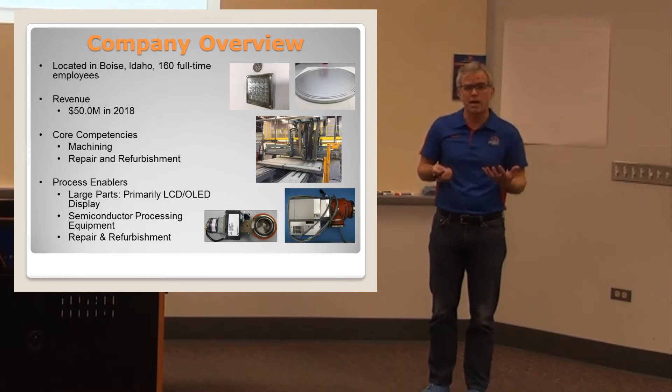But our core competencies are machining and repair and refurbishment. I'll show you a little later some of the components that we machine, some of the machines that we use, and then some of the repairs that we do. We literally take electromechanical devices, seals, robots, valves that our customers use that for whatever reason have failed, and we tear them apart, we clean them, and repair them like new. Whether that be a printed circuit board, a valve, a bellows, electrical wiring, anything of those natures we can refurbish.

Basically, for all intents and purposes, we're process enablers. We add value by creating products that allow our customers to make LCD and OLED displays, semiconductor, memory chips, and microprocessors. That's the industries that we serve. We do a little bit in aerospace, we do a little bit in medical.

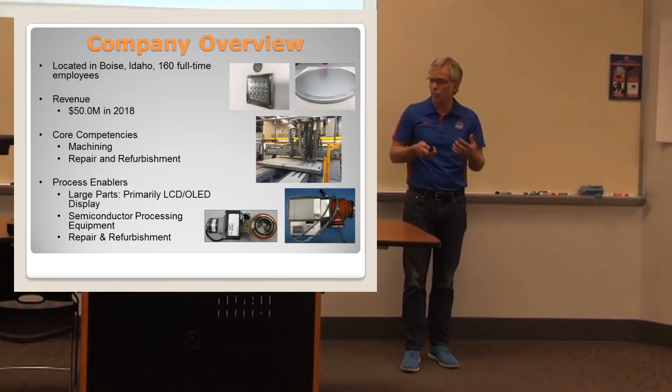But just to give you an idea, an analogy of the markets that we serve, I want you to think about your very first car that you ever drove or had. I'm sure that if any of you are like me, it probably wasn't the greatest thing. This was my first car, a 1975 Ford LTD station wagon. It got from point A to point B.

And at that time, the manufacturing of a car included a lot of human work, hand work, and machining. Matter of fact, the very simple motors that were going into cars like that were built on very simple machines, in some cases forging machines, in other cases stamping machines, and so forth.

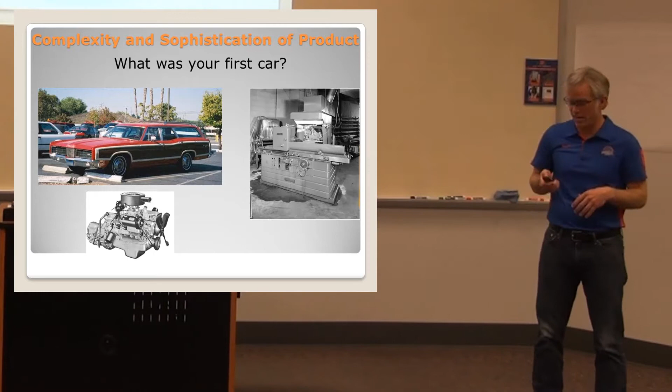That was my first car, and the machinery to make that stuff was pretty simple. What I wanted when I was a young teenager, as my first car, I wanted this. Most of us understand that when you drive a Ford station wagon and you see an Indy 500 car, you definitely want the one that's faster, more sleek, and more cool.

The reality is that over the course of about 35 years, instead of having basic machines and basic components to get a car to operate the way it's intended, we've taken vehicles from just getting point A to point B to adding sensors, adding computers, adding features. All of us are accustomed to those today in our cars. But in order to do that, we had to get away from a lot of the manual work and into more highly sophisticated machines - simple to say, but harder to do in practice.

This machine right here is what we call a duoBLOCK. It's a 5-axis machine that can mill engine blocks, engine heads, and transmission components that are extremely complex and tight tolerance. 35 years ago that was impossible to do - we just could not do that with the machinery we had. The evolution we've seen in practical things we use in daily life has also happened in the industries that we serve.

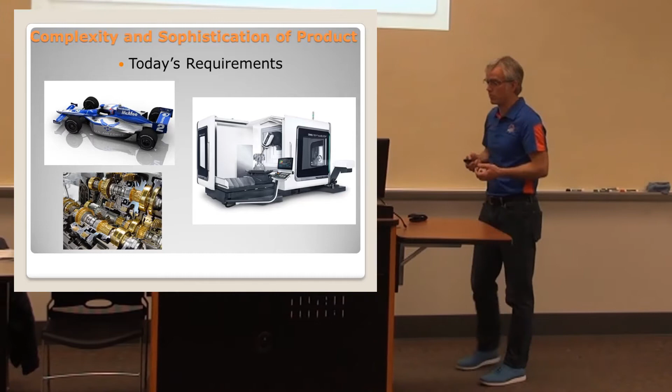Back up to about 1998, 1999, most of us can remember a TV was a cathode ray TV. How many of you actually had a cathode ray tube TV? So most of you know what I'm talking about. How many of you still have one of those TVs? They just don't exist. Let me describe the evolution that's gone on in making this TV to what we all watch today.

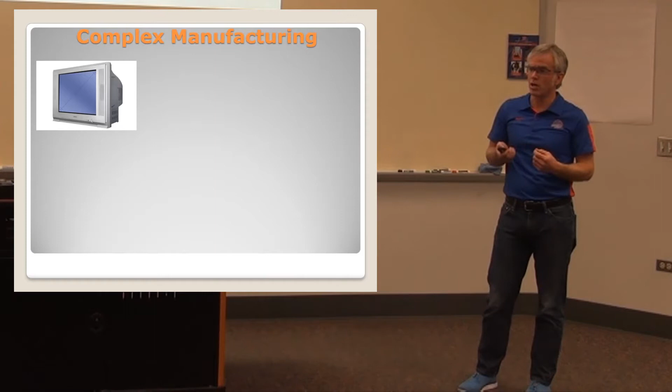This TV, which is a Sony TV, had very little machining. A lot of the components used to make that screen were screws, assembly components, stamped pieces such as housings and bezels, but very little machine components to make any of the work in that TV. If we were to look at the quality of that TV versus what we look at today, none of us would want to go back to that at all.

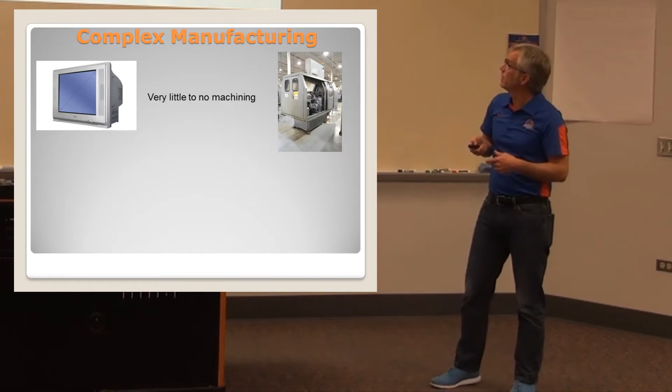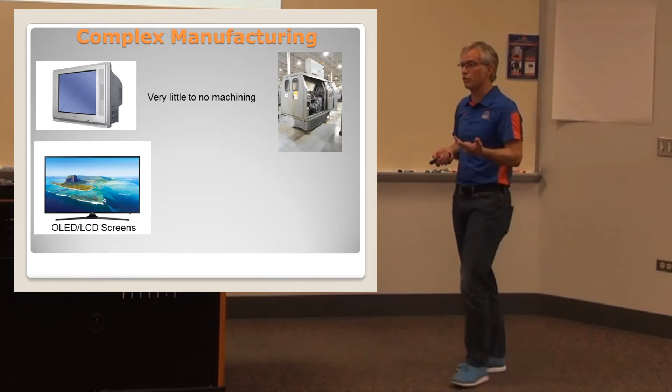The reality is today we all use OLED and LCD TV screens, and these are extremely complex, sophisticated, and very challenging to make. This is one of the areas we're involved in. We sell components used to make LCD and OLED screens to Sony, Samsung, LG, Sharp, Vizio - all the screen manufacturers in the world. We have components that go into their machines to make those.

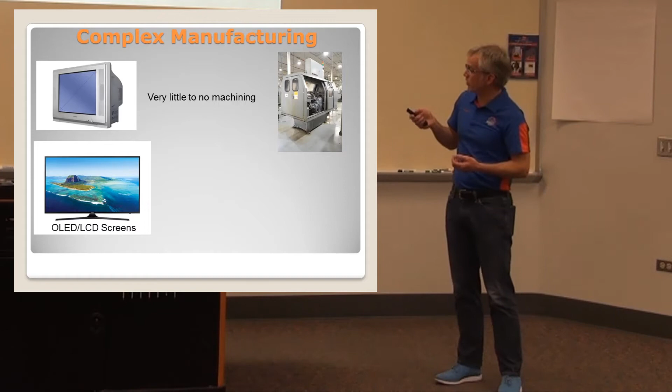If you look at the machines that were used to make the old cathode ray TVs and their components, the complex machining today is much different. I'm going to share some of this with you today.

This machine right here, we have 19 of these at our facility. These are 3 and 4 head milling machines, about $990,000 a piece. We make a large component we call a diffuser. It has anywhere from 25 to 170,000 holes in it, all different geometric angles, to create basically a shower head. It allows material to flow through this component onto glass so customers can make a transistor in the glass itself.

In order to manufacture that screen, the machines that are used to make it, which our parts go into, typically cost about $90 million - just so you can get the machine and start producing glass. You still have to make the TV, and that's another complex thing.

But in 1998, AceCo was asked if we could make components that were a 1 foot by 2 foot square with about 3,000 holes in them. I'm going to pass around some examples. So we started making those. What you'll see here is a cross section - you'll see a cone on the top, a counterbore drill on the bottom, and a very small through hole intersecting those. It basically looks like an hourglass.

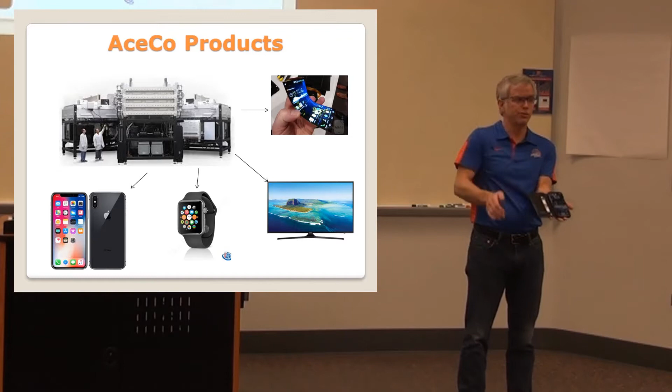Samsung will produce this year at the Consumer Electronics Show in Vegas a foldable phone that, rather than having a phone with just a screen like this, you'll open it up and you'll have 2 screens all connected together, foldable and flexible completely.

Well, the only way that can happen is having the capability of a machine shop and other component manufacturers with the ability to make components that make these machines work like they do under extreme tight tolerances. We can no longer operate like we used to under very broad and open tolerances.

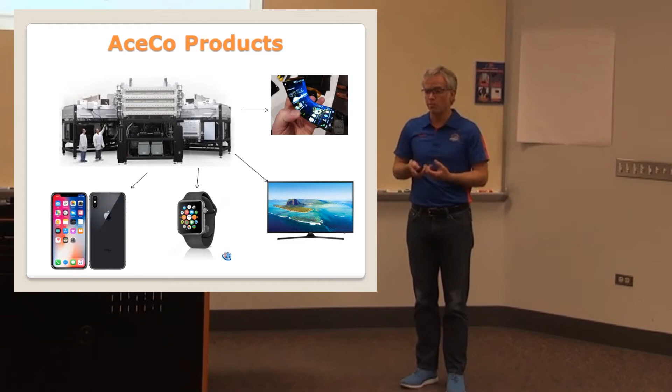We are drilling parts, going back to this part right here, 12 feet by 12 feet, with a flatness plane of 10/1000ths of an inch.

We drill 170,000 holes on this component here, very similar to what you're passing around there. The intersecting hole is 16/1000ths of an inch. It can be no greater in diameter than 1/10,000th of an inch across all 170,000 holes. And in addition to that, it cannot have a length change more than 2/10.

So when you're drilling 170,000 holes, understanding how your machine works is one thing. Being able to drill it and have the correct machining components, that is the drills, the end mills, and so forth, to do that is another thing. That's what we've perfected at AceCo.

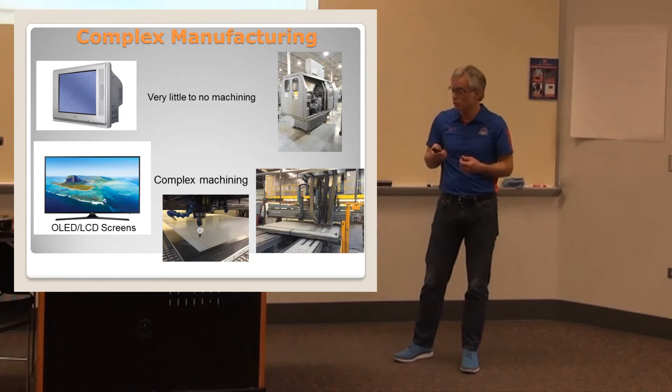Here's a diffuser. That is a coupon taken right out of the middle of this diffuser here. If you are carrying a Samsung Galaxy or an iPhone that has an OLED screen, your screen was made on this part. Every single iPhone and Samsung Galaxy that we see is made on an AceCo part. Every single one of them. Typically LG and Samsung and Apple, all of them making those screens.

So you can see, here's the blown up cross section of that. Having a large cone with a counterbore, doesn't show the full length of the counterbore, but that intersection right there, and removing and ensuring that there's no burrs at any of those intersections, is AceCo's value.

We've spent decades in our company collaborating with our engineers and our machinists and our machine tool manufacturers on how to do this, so that not only do we produce one part, but we can produce thousands of parts, always being the same without change.

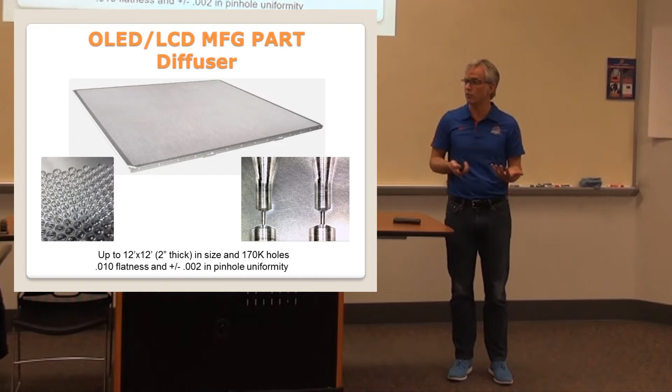The last thing our customers want to do is figuratively have a recipe to bake cookies and realize they've got to change the recipe, the temperature, or so forth. And in this case, the complexity of the processing is incredible.

In addition to that, AceCo makes other components that are used to make memory chips and microprocessors. I'll pass this one around as well. It's called a faceplate. And through that part, in a machine very similar to what you see up here, our parts are used to lay a deposition onto a silicon wafer.

In that matter, customers are able to lay the architecture and the design of the chipset in those machines. That part that we're passing around right there has about $170 worth of material, and at AceCo, that part will sell for about

$3,500. We make roughly, maybe 750 of those a month, of all different designs. On a good month, maybe 1,000 of those.

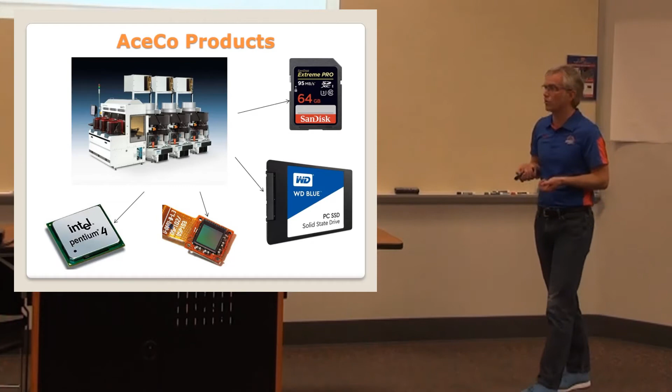But our customers, the Texas Instruments, the Samsungs, the Sonys, the Intels, the SanDisk, all of those chip manufacturers are using our components to actually make their wafer chips, which we use every single day, all of us in this room. And for that matter, this is a new iPhone 11, which, by the way, is an incredible piece of electronics.

I have one here, and to see it broke down and look at the complexity of what it can do, not only do we have the flash storage and the sensors here on one layer, we have the microprocessor, the modem, the receiver, and in addition to that, the battery itself. All of that stuff being put in a very, very small, compact design that we carry around with us.

The capability of these components now require machine shops to have extremely high tolerance in our machining. The only way that we can allow our customers to make the chips that they do is to produce extremely tight tolerance parts.

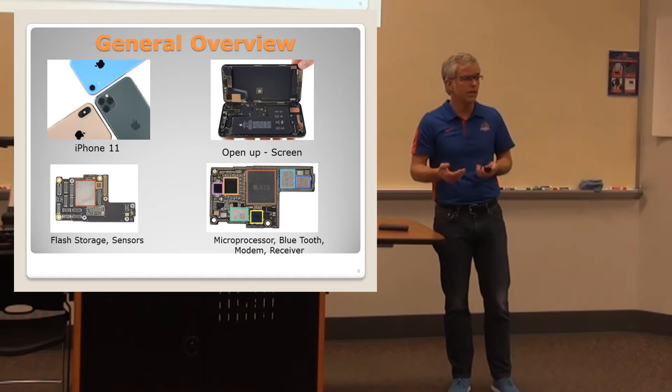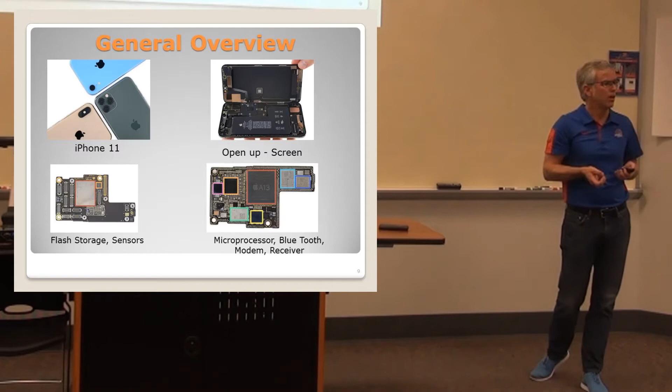Historically, in the last 15 years, chip manufacturers - that's the Samsungs, the Microns, the Intels of the world - were typically laying deposition and memory in a very lateral motion. But now the chip manufacturers are doing all of that in a 3D architecture and going vertical, through a series of depositions. So on a typical chipset, you can have roughly 250 to 350 layers of deposition, anywhere from 8 to 10 atoms thick, all the way up to a couple microns thick, depending on the application.

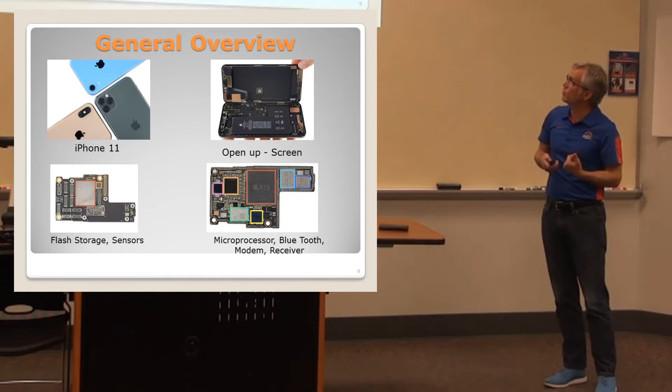But the reality is that we, as users of electronic components, are demanding more sophistication, more memory, more processors, more capability. And as a result, we want it in our hands in a very small area with extreme low heat and processing, so that it doesn't eat up the battery. So there's been a lot of demand on machine shops to increase the sophistication of the product that we make.

So here are some of the other components that we make. For instance, a gamma shower head - this is used by Intel for a deposition process. And an electrode, on a Tokyo Electron tool set, used in the etch process to etch away material to create the architecture on a chipset.

And other components - this is a susceptor pedestal, with wiring and a built-in heater. That heater can heat up to about 570 to 620 degrees C, and the wafer actually sits on that pedestal and heats up during the processing itself.

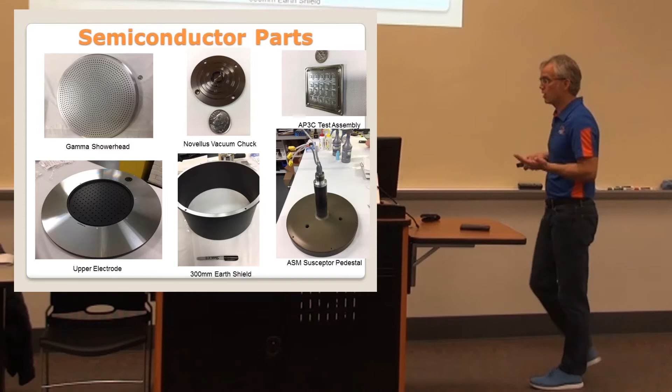And the top component here is a Novellus vacuum chuck. We sell those components to Intel. It's made out of a high-density polymer called Vespel, made by DuPont. That piece of material right there is about $580.

So the last thing you want to do as a machine shop is come up with a process that doesn't work, so you end up scrapping $550, $580 pieces of material over and over. So we have a lot of demand on our engineers to collaborate with our machine shop on how we design products - engineers are great, extremely good at creating and designing product, but in many cases some of the stuff that's designed can't be made. And that's the challenge we have as a machine shop: taking designs and making them into products that can actually be produced.

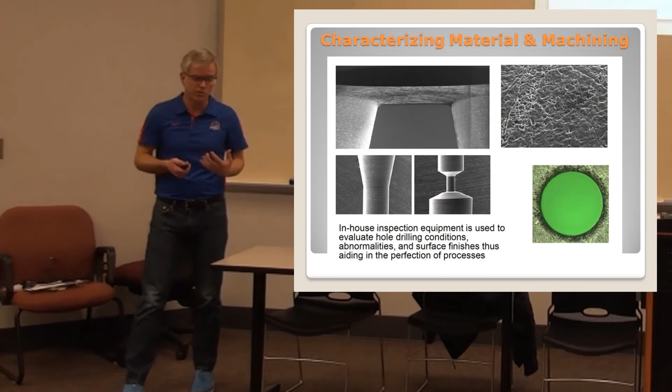At AceCo, we consider ourselves a high-precision machine shop. I've been around enough machine shops to know that there are very few, matter of fact I don't know of any machine shop that says they're a low-quality precision machine shop. Everybody says they're high precision, but the reality is that AceCo is extremely high precision.

And we use very sophisticated inspection equipment, which I'll cover here in just a bit, to help us understand how we machine. For instance, at our facility we have an electron microscope that we're capable of using for material analysis and high-resolution pictures, to help our machinists understand what they're machining, and also to help our engineers who design these products - these types of holes and features - better understand whether or not they're machinable.

In this case, we were trying to put a radius at the top of this cone, and that radius is very challenging because typically on a radius tool it'll leave a step. So our engineers came up with a brushing method - a way of brushing with a kind of brush sandpaper - to actually round that edge. And that product is now enabling our customers to make an extremely sophisticated touch screen for the medical industry today, for high resolution review of x-rays and other imaging, which probably wouldn't be possible had our engineers and machine shop not figured that out.

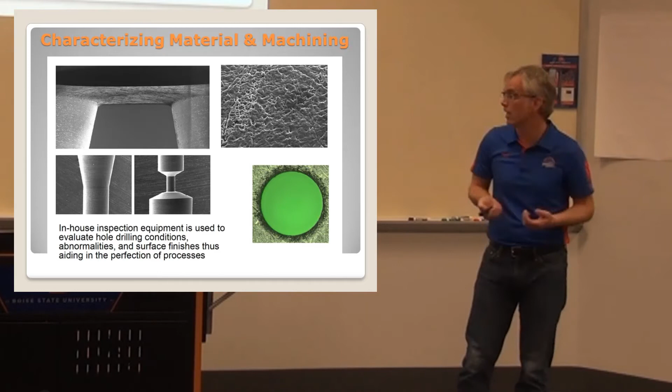In addition to that, we work with our machinists and our engineers to identify the best type of machining components today that we can use in our production process to produce the tolerancings that our customers require.

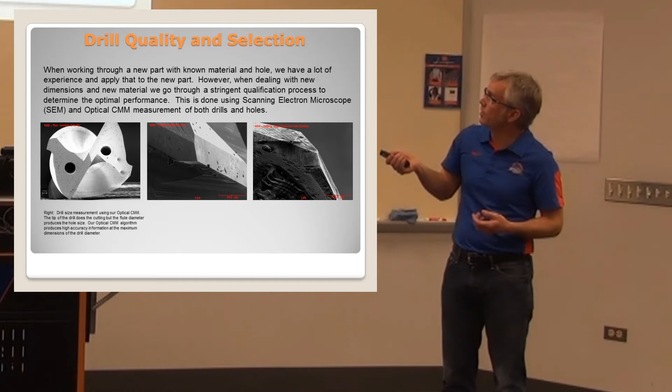I'm going to pass around an example of that. This drill right here is 16 thousandths of an inch in diameter, extremely small.

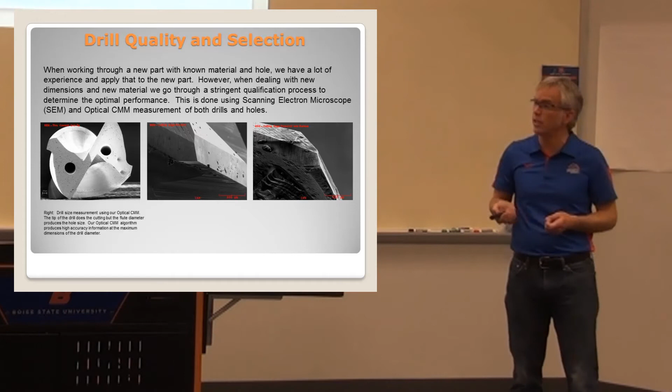In 2014, Mitsubishi figured out how they could put a hole from the top of that drill all the way through the cannulation of the drill so that coolant could come out right at the tip of the drill, right next to the cutting surface. As a result, we could eliminate the binding of the drill, the heat that occurred, as well as the chip breakage we needed. We were able to produce a much smoother surface with that and the longevity of the part itself.

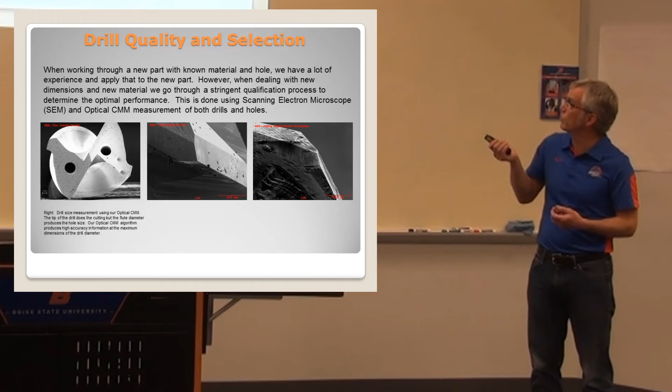In addition to that, we were able to take our inspection equipment and understand at high resolution how the tips of the drills are wearing in the process. This is a brand new drill - you can see how sharp that is - and after drilling a number of components, this helps us understand how many holes we can drill before the quality of the hole breaks down.

I'm going to pass around a drill here so you can actually see how small that is. If you drop it or break it, don't worry about it, I'll pass another one. But right on the very tip of this drill - I know it's very difficult for you to see - if you'll take the magnifying glass with the front downward and look at the end of the tip, you'll be able to see the holes in that drill and see how small they are.

Our engineers developed a process to understand how we filter the fluid going through that drill, but in addition to that, identifying what pressure we can run that coolant through the drill and effectively cut the material we were working on.

That drill runs anywhere from about $40 to $90 a piece. Some of the higher end ones we use can go as high as $150. When you break 100 of those in a month, it starts to add up.

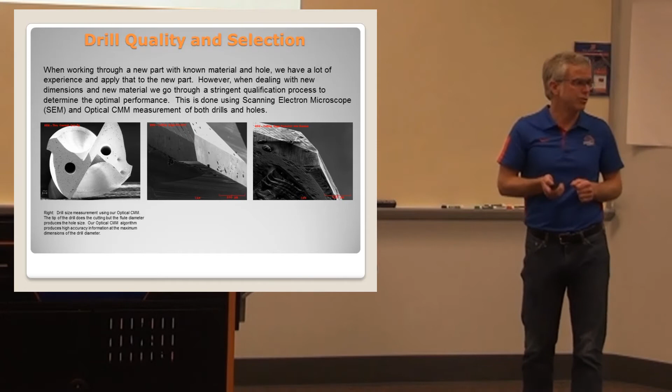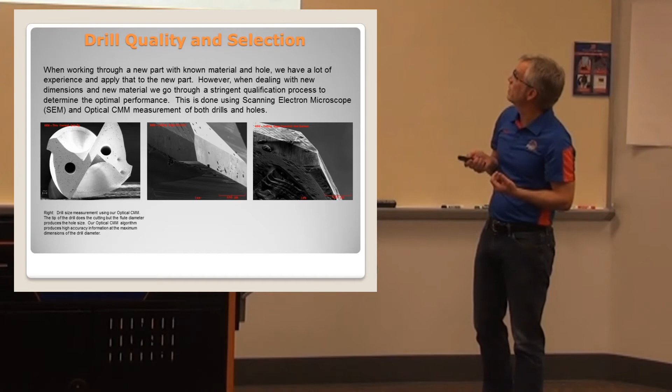Literally at AceCo, what we do is we go to our engineers and say, you figure this out. You figure out how we can take this drill that can produce incredible sophisticated holes and very high polished surface finish, and you figure out how we can use that in our operations. It's been a great challenge for our engineers, but with the tools we've been able to be successful at that.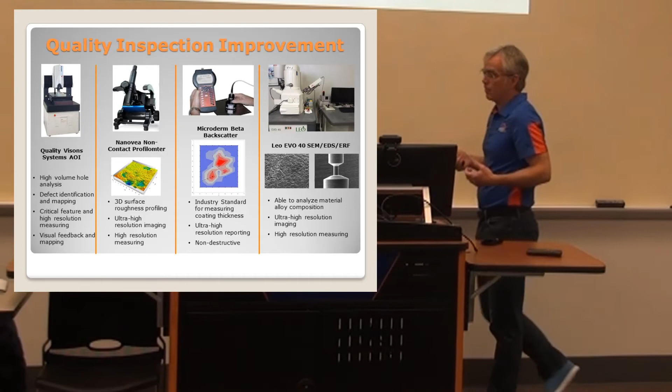In addition to that, we have found that having highly sophisticated inspection equipment is important. To do that, we have several pieces throughout our shop that our engineers use every single day, and it's expected of them to become experts in some of this equipment.

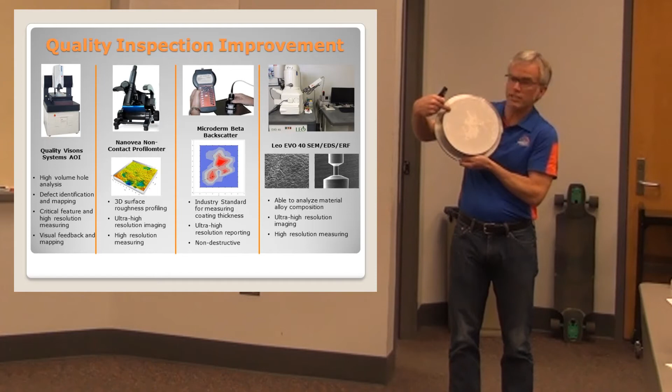For instance, this over here is what we call an AOI, automated inspection. It can take a plate similar to this one here, and it can take a measurement of the diameter of the hole. It can take a picture of every hole, and if properly programmed, can focus in on the top of the hole and then go down to the bottom of the hole, so the optics go through the hole, then focus at the bottom and infer the length difference.

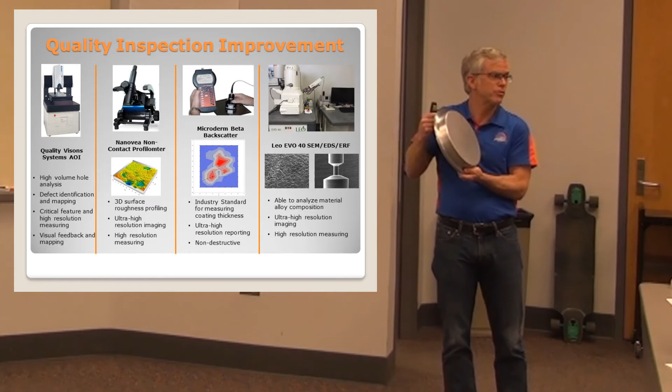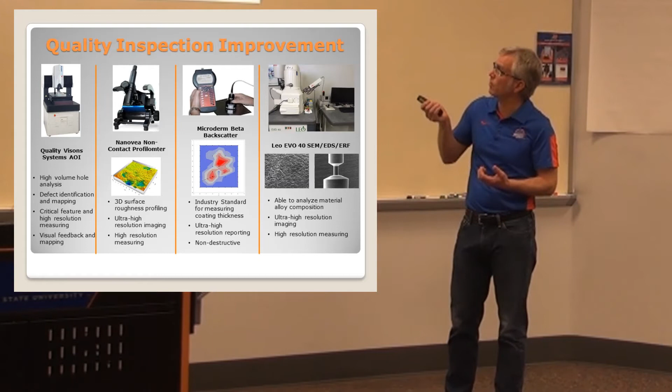In this case, we're only talking about 3,000 holes. We have components just slightly bigger than that, about 20 inches, that have 60,000 holes in them. That piece of equipment could do all of that measurement and picture simultaneously, multiple holes at a time, in roughly 4 hours.

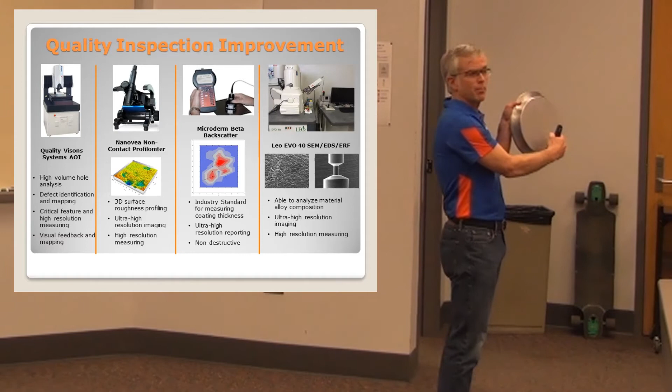Our engineers are expected to then take the pictures and measurements and quantify that to identify if on this part or others we make, there are certain regions that might have a greater diameter than others, utilizing the same drill, or the length of that small hole might be different as well. Incredible piece of equipment.

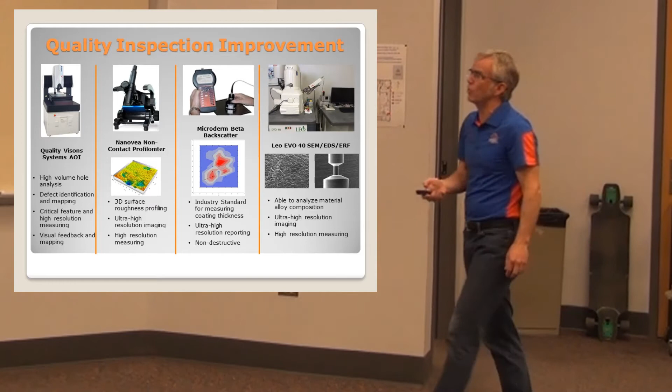It's about $290,000 and takes roughly one engineer to run all the time at our facility.

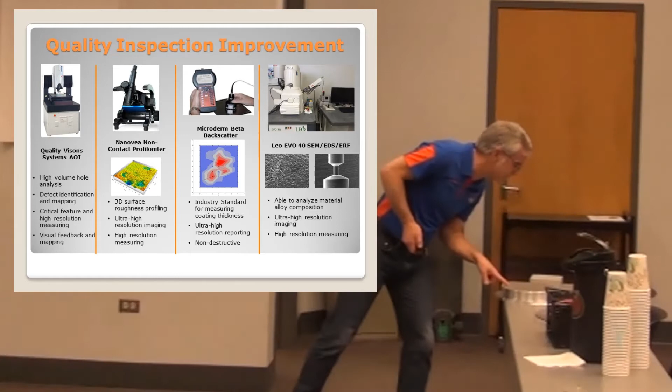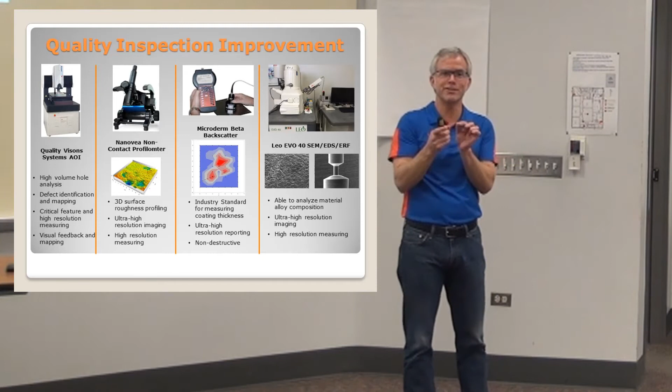In addition to that, we have a non-contact profilometer. We want to know the surface roughness of the product that we produce. In some cases our customers dictate to us a certain RA, or surface finish. Sometimes they want a high RA, maybe 100 RA, but other times they want close to a mirror finish, a 2 to 4 RA. The only way to do that is to have some type of measurement device that tells you what you're cutting and machining is hitting that certain surface requirement. So we can not only take the measurement, but we can profile it and understand in a picture view what that surface looks like.

Incredible piece of technology under high resolution measuring. This is a new one for us, a beta backscatter. It allows us to measure coating thicknesses. Much of the product we produce today gets anodized, in some cases down to 2 micron anodization, other cases 60 to 70 micron anodization, and other cases ceramic coatings, yttria spray, rare earth material coated on these components to help them last longer in the production field. As a result, to ensure the uniformity of that coating is the same throughout the product and it's being applied correctly, we use this beta backscatter to help us understand that, and from there we develop a map that shows deviations in the thickness of that coating.

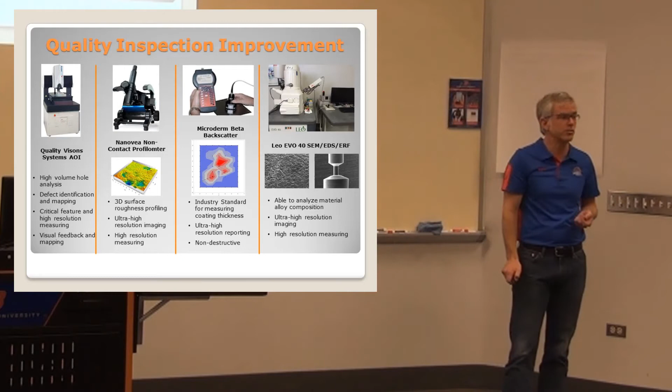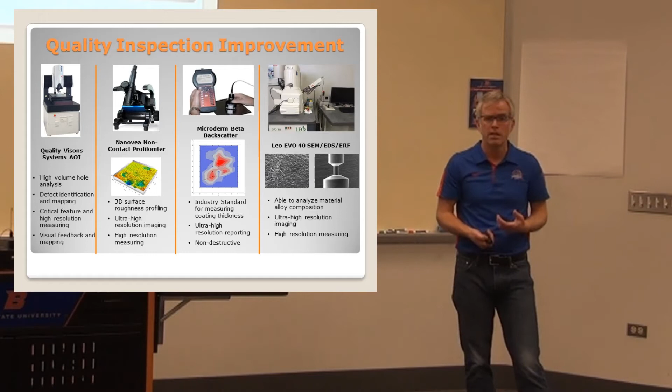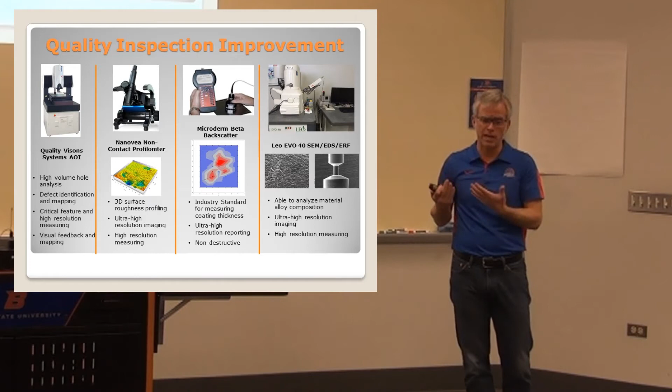But of course the biggest toy our engineers love is the SEM. It has an EDS XRF, so we can do material analysis. There's not a day that goes by at our facility where we're not taking alloy, whether it be a chip or a raw material, putting it under our SEM and identifying the material composition. In some cases, buying 6061 aluminum, which is about 90% of what we use as a substrate for manufacturing. Many people think 6061 is just common, but there are certain types with low silicon, low magnesium, and in other cases steel or other alloys that are precipitants in the alloy itself, but still provide certain features for coating and machining. So we use that all the time to identify what we're doing.

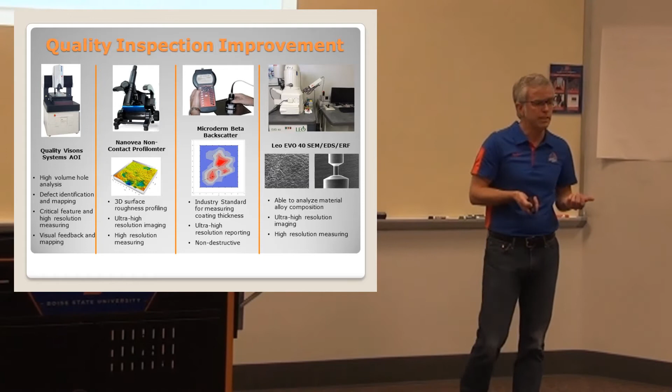I think most of us have seen those detective shows where they sample something like lint and trace it back to a cloth purchased at a store, and that's how they find the killer. Well, we do that same type of thing at AceCo, and we use these tools to help us understand what we're making.

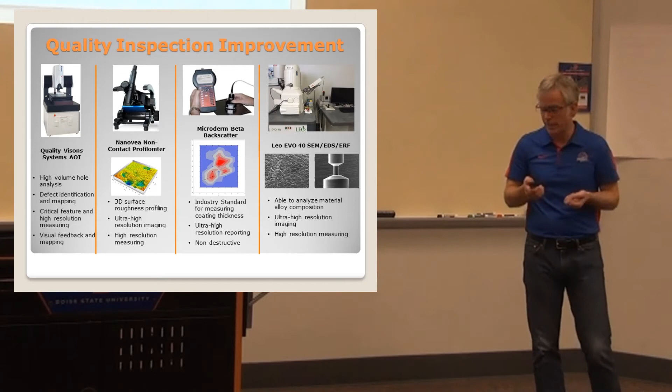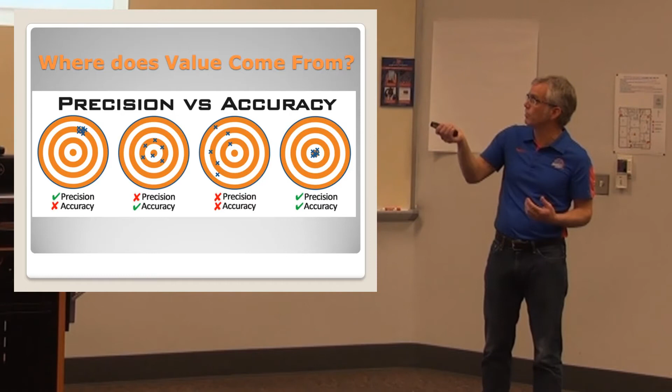So I've been asked several times, where does AceCo add its value? Really, much of the time I've been at AceCo, we've been operating in this middle range where we've been accurate at some times but our precision isn't there. Other cases we haven't had any precision and accuracy. Over the course of the last 10 years, our focus has been moving from this area to where our parts are precise and accurate all the time. Our customers don't want precision without accuracy, they don't want accuracy without precision — they want precision and accuracy all the time.

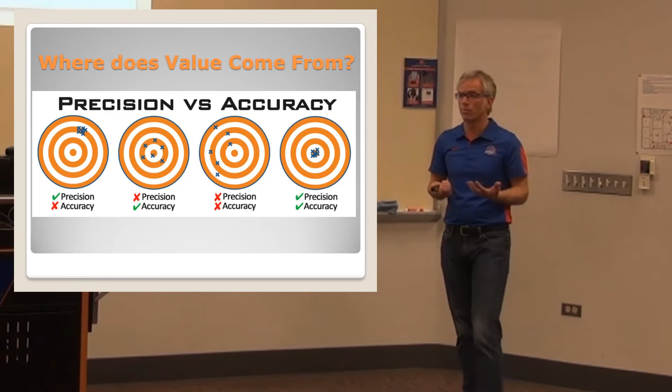And our engineers at AceCo spend the majority of their time not designing product, but helping us understand how to use product in our operations. That's where the value gets added. Matter of fact, very little value in our company is attributed to the actual design using SolidWorks or some other drawing tool. The value is really added by engineers who go out on the floor and work with our machinists on making something that otherwise, typically and historically, has been impossible to machine. As a result, we've built our business model around making very precise and very accurate parts.

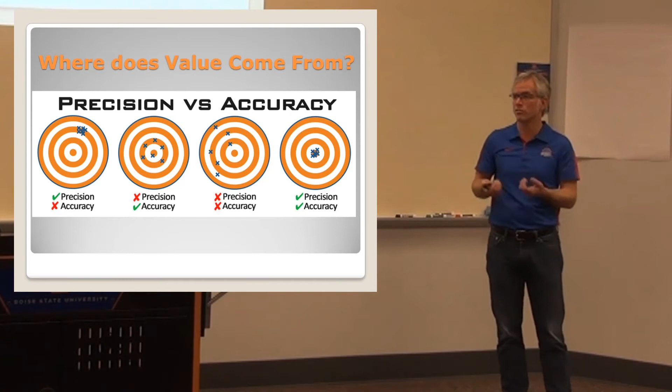And that's the reason why we're dealing with companies like Intel, Applied Materials, Samsung, LG and so forth. That's what they require all the time.

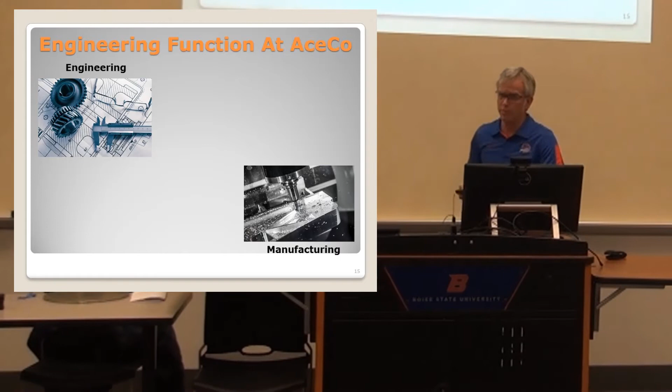As an engineering function at AceCo, let me explain some of the typical engineering protocols. Traditionally, engineering goes through a design process, looking at how product is designed, whether it be some of the components passed around today or some other type of widget. The design is one piece, but there's a traditional handoff that's been done, through a print or a 3D model. The engineer hands it off to the machinist, who spends hours of time, successful sometimes, unsuccessful other times, trying to figure out how to machine something. The reality is this model no longer works. Maybe it does at some facilities, but at a high precision, high accuracy machine shop, this model does not work and hasn't for quite some time.

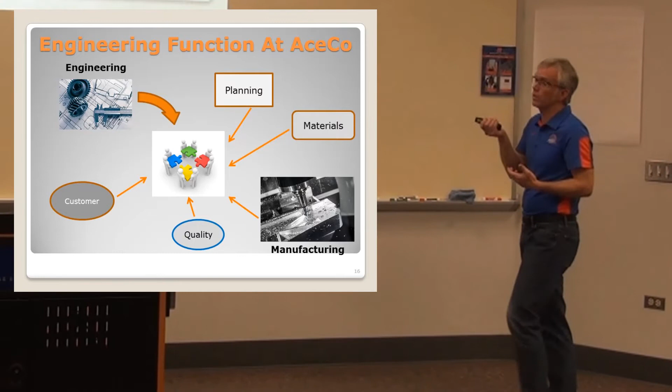The model that really works at AceCo is a much more collaborative model where we bring together a collaboration of teams - not only our engineering, but our planning, materials, quality, our customer, and our manufacturing - and we tie them all together. In our company, neither entity is greater than the other. Our engineers are no greater than our machinists, our machinists are no greater than our engineers, our planning is no greater than our quality team. We expect to add value by bringing all of these things to the table. Much of our success has been built by taking engineered product, which has to be done, and grabbing everything else within our company to collaborate on how we can make that. That goes back to these components right here - not only are engineers using them, but this entire team is using those components to identify how we're machining and making the product.

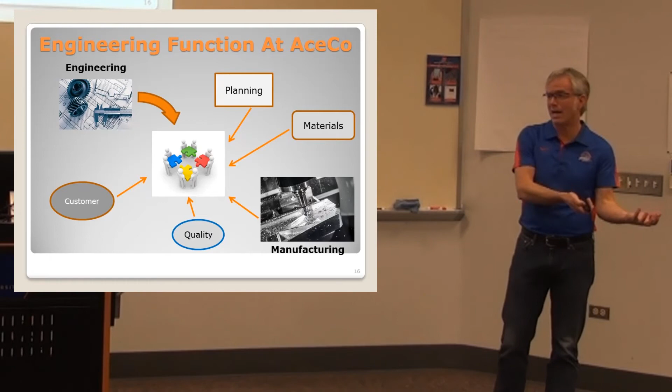This occurs as a collaboration every single day at our company. As a result, our expectation when we hire somebody in quality, inspection, planning, or engineering is that they have skills to interact and work with others. Much of that means you have to be out of your desk and on the manufacturing floor. Our expectation is that our engineers spend no greater than 15 to 20% of their time at their desk. Remember, the value at our company is not added by creating and designing, it's added by improving and designing processes. So once a concept is formulated and put to print or 3D model, our engineers work with manufacturing and other groups to identify how it can be made. Our lead engineer today will spend his entire day away from his desk working with our manufacturing team on how to improve a process. I'm going to give you that example right here.

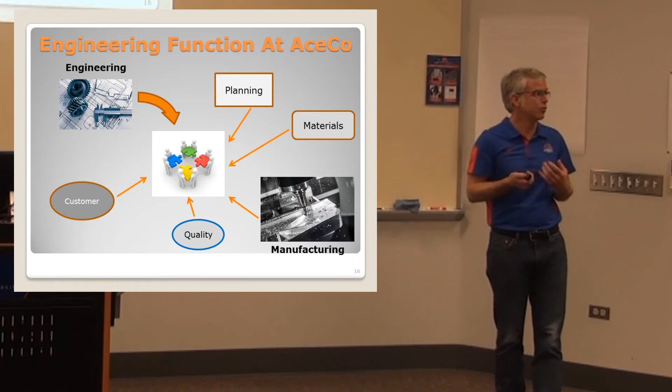We have this hole, similar to this plate, where you can see there's a counter bore and then a long pinhole. Our customers came to us and said they are buying this product from another machine shop and having problems with it - they're seeing a restriction of flow through this hole. We have a highly sophisticated flow conductance meter that we can seal on this surface and run a nitrogen flow through the hole, and this device will read the feedback or pressure created. Even small minor abnormalities, whether a restriction in the hole's diameter, length, or a burr, can create a flow difference. Our customers were seeing that restricted flow rate, and we identified through our analysis that it was attributed right at the exit of that drill hole. We drill the hole from the top down through and it exits this surface.

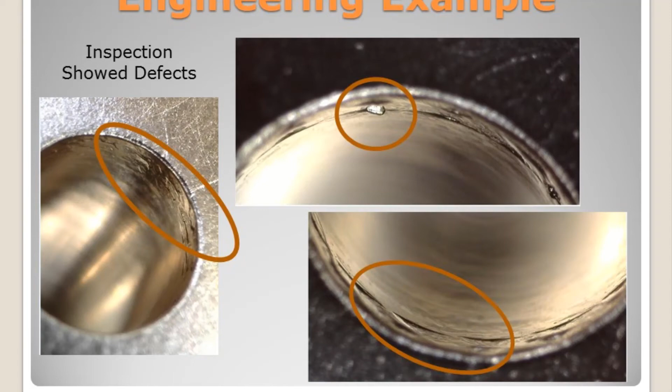And this is what we found. Our engineers identified these small deviations created by our competitor that were creating problems in the manufacturing of microprocessors and memory, 3D memory chips - specifically burrs at the top of the hole, chatter marks, and these types of voids, which we have now been able to figure out how they occurred or how our competitors were creating them.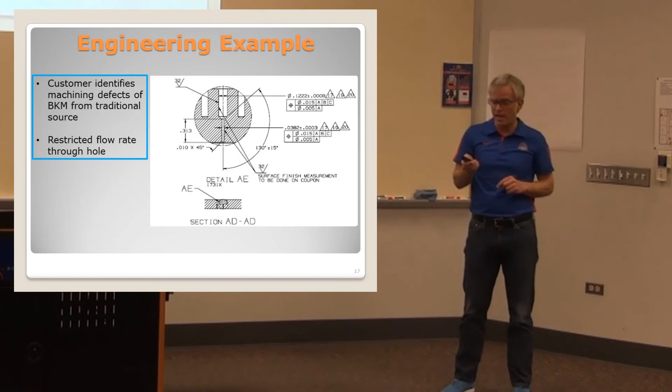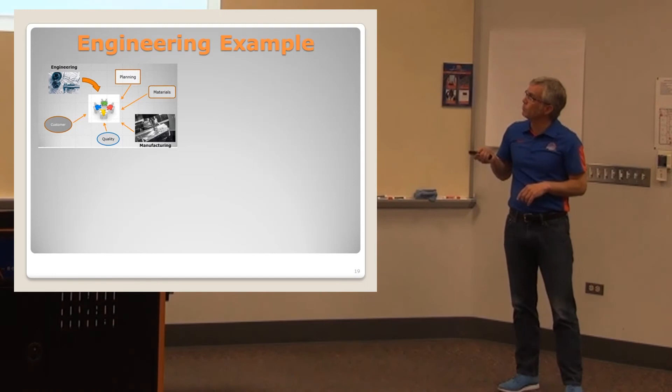He's not the one that designed this, that was already designed. What he added was a collaboration with our machine shop on how to machine this burr-free. We took this collaboration team led by our engineer with a group of folks, and he identified this through-coolant drill in a different flute type with a different chip rate.

Where is that drill at, by the way? Can you see the hole? Just got it, but okay. Not yet. So in this case, that drill is a little bit different here.

Our engineers and manufacturing team thought that if we could put this little relief right here, and then also this relief here, we could reduce the chip coming off of the cut. Rather than a curly-Q chip, we're breaking that chip and literally making a powder. That's what it really looks like. The chip is so small, and when you're only drilling at 16 thousandths of an inch, you can imagine that chip being very small.

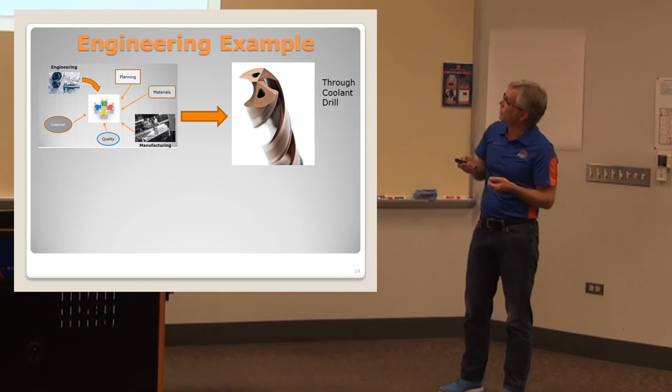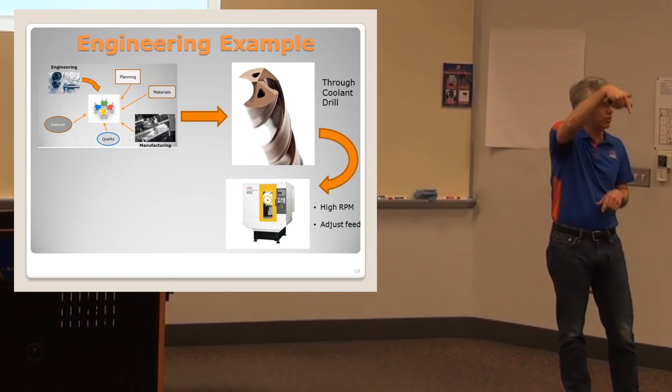As a result, our machinist, working with our engineers, identified that if we use this tool, called a Fanuc Robo Drill, it's a high-RPM spindle, runs at about 24,000 RPMs, and we could adjust the feed rate—that's how fast we push that drill through the product—or use a pecking motion as we drill it. We came up with that drilling algorithm on this tool. That tool costs about $150,000. We have 37 of them at AceCo right now, making these types of faceplates all day long.

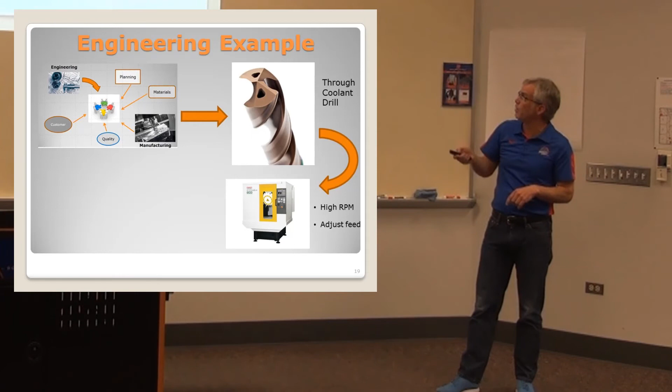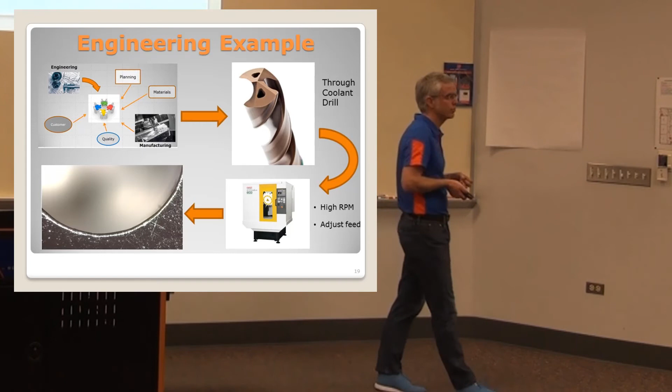But they figured that out in that collaboration, and as a result, produced an absolute burr-free hole. I told you that took about 3 weeks. The expectation from our customers now, moving forward, is that process happens in 2 to 3 days. So our whole focus within our company, moving into 2020 and 2021, is absolute speed.

That's a challenge for our engineers. It's an extreme challenge for our production and inspection folks, because typically each one of those groups wants to dot their I's and cross their T's all the time. They want data, data, data, data. And in reality, sometimes the decision-making process means we have to do it much quicker, and we may only have 90% of the work we want done and still have to make a decision.

So if there's something I can tell you today, it's that at least in the manufacturing field, speed and decision-making is highly critical—doing that very quickly and accurately, understanding that sometimes we make mistakes. We're not going to have all the time. If you have 3 days to do all this work compared to 3 weeks, that extra couple weeks is where we dot our I's and cross our T's. The reality is our customers just simply don't have that time anymore. So we try to do things real time, real quick, and it requires that collaboration.

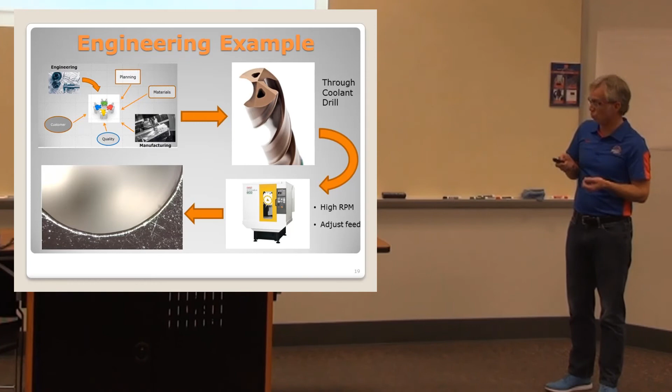From the AceCo standpoint, being a machine shop, getting from an education to a job is one thing, but adding value and skill sets in the workplace is never ending. We hire machinists, engineers, quality and other types of inspectors all the time, and quite frankly, about 10% of them are of the model we want. Typically they come with great education and very little experience, but don't want to spend a lot of time understanding more about the value they can add.

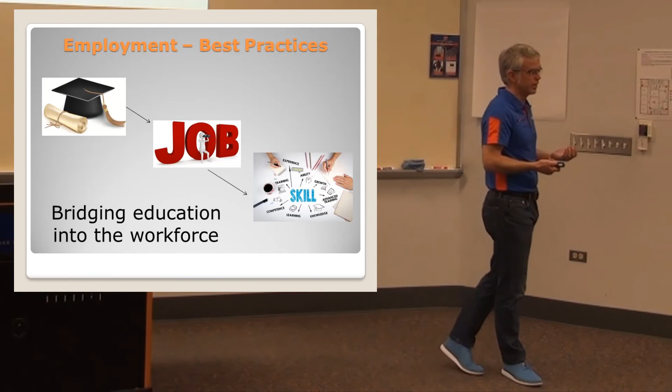In some cases, that means understanding and spending time outside of the job function they're hired for. Machinists and engineers at AceCo don't just work at their desk or machine, they're constantly working together. But an engineer who doesn't get out of his desk and go wear some dirty clothes, maybe gloves and safety glasses, is never going to make it in the AceCo world, because they'll never understand how a product is made. We're challenged with that. We suffer in our industry not getting enough aptitude and willingness from people we hire to be part of a collaborative team rather than just focusing on what they've been educated on.

There's one piece of advice I can tell you: never stop learning. I appreciate when our employees come to me and ask questions. Wherever you end up in your professional career, if you don't ask questions, you'll never hear the word no, and you'll never hear the word yes. So I love when our employees, engineers, machinists, accountants, custodians, whatever, ask us questions and ask us, can we do something different?

Just the other day, I had a machinist come to me and say, Sid, I've been running this machine now for 12 years. It's the same machine. There's another machine over here that can improve the quality and probably improve the process speed by about 20%. It's $145,000. Would you please go buy it for us?

$145,000, a lot of money. But let me tell you something: I can't say no and I can't say yes if an engineer or a machinist doesn't ask me those questions. So if there's one piece of encouragement I can give you, it's go to your employer and ask questions. Ask them for resources, beg them for resources, but do it with the understanding that you're going to take what they give you and give them a return on their investment. Not only an investment in equipment they buy, but the investment in you, because you're the ones they're paying to bring solutions to their work.

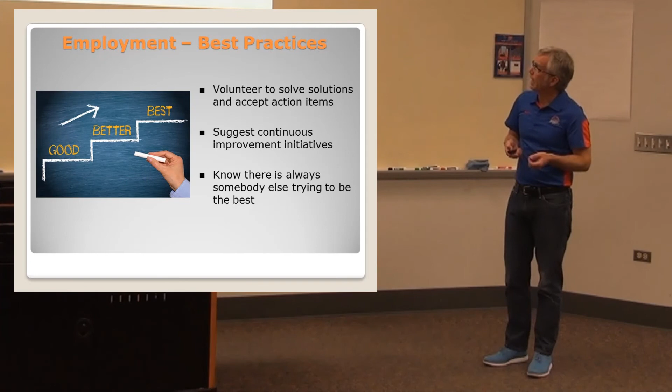And I guess last of all, I think most of us understand about good, better, best practices and so forth. So with that being said, I'd like to open it up for some questions that you might have.

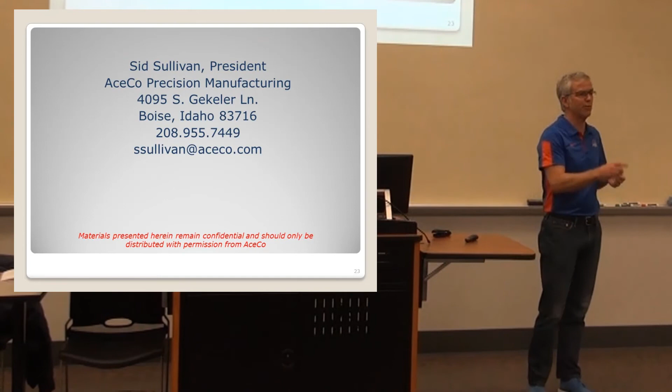By the way, did everybody get a chance to look at the drill yet? Okay, what'd you think? Pretty cool, pretty amazing, huh? Did you see it? You couldn't see it? Did anybody see the hole? A few of you did.

I am still amazed to this day that a company can figure out how to put a hole through the cannulation of that drill. A drill that's only 19 thousandths of an inch, that drill hole has got to be 4 thousandths of an inch in diameter. If you ever want to amaze yourself, just go look that technology up. It's called through-the-spindle coolant drills. There's a lot of them in the world, and it's amazing how they figured it out. By the way, engineers and machinists collaborating figured out how to do that.

From what I've seen, a lot of your products revolve around drilling really small holes. Have you ever looked into EDM? Terrible, yeah, absolutely terrible. The reason is they cannot produce a surface finish as clean and cut as a hole. Even a wire EDM or a sinker EDM, it's too rough. You'd have to go back with a reamer or something of that nature. And yes, we have spent a lot of time and resources — that whole piece of gray hair right there is EDM.

Definitely challenging, yeah. But I got to tell you, great way of thinking here. That's what we expect our engineers to do, is to go out and figure out and question and ask why or how come, or for that matter, take it one step further and say, I did this, now I'm ready to test it. But yeah, absolutely.

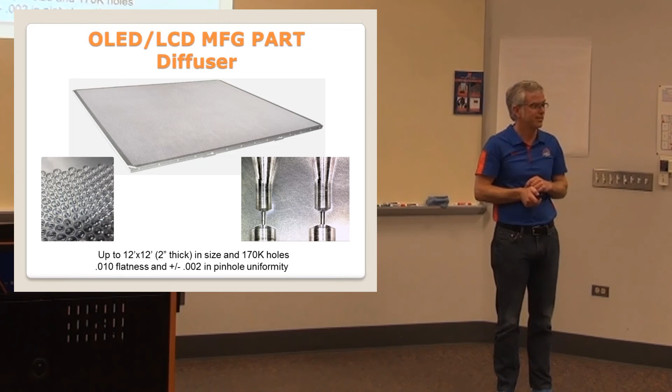Let's go back here to the big diffuser, about 142 inches by 138, something like that. If we were to ding any one hole here, whether on the cone or down in here, or hit the surface, that entire diffuser is junk. You gotta throw it away. That diffuser right there sells for $82,000. I call it throwing away an Escalade, like throwing away a vehicle.

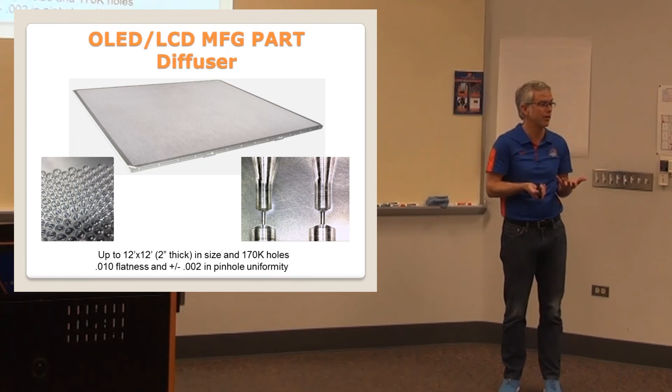And by the way, I've got a scrap yard of them, piles of them. It's extremely challenging. The value that we add at AceCo is figuring out how to reduce that scrap and minimize that. It's one thing to drop a tool on there or have a tool come out of the tool holder, but it's another thing to handle and move things in our shop. Our engineers develop handling fixtures and stuff like that to help reduce that.

Are there methods of building that in sections and fusing them together? That way it costs less, or it's less risk?

Yes, kind of, but let me put it in this perspective. Let's say you were Samsung and you wanted to make a piece of glass that big. You can't have a margin right down the middle of it and expect a customer to buy a TV with a line right down it. These parts are so sophisticated that they can pick up surface defects of 1/10,000th of an inch on the substrate of the glass itself. So having it be extremely uniform is challenging.

By the way, we've looked at doing that. In some cases, you'll see large displays at sports complexes and other advertising where they've done something similar, piecing together displays by making diffusers, but they do come with a margin. It just looks weird.